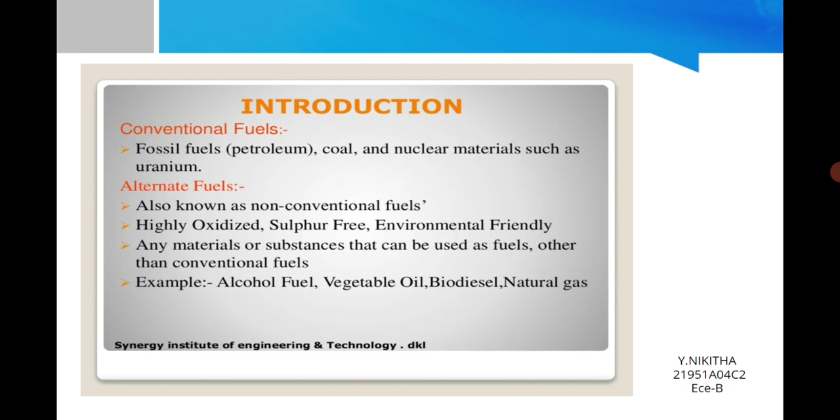Why we chose the alternative fuel? Conventional fuels are going to run out. To reduce the pollution, to protect against global warming, to save money, biodegradable and non-toxic, easy to handle and store, rural development.

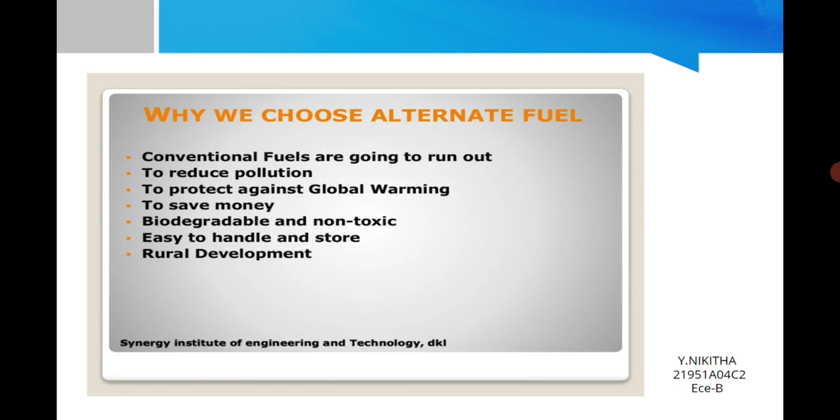Different types of alternative fuels: alcohol fuels, ethanol and methanol, water gasoline mixture, vegetable oil, biodiesel, hydrogen, LPG and CNG, electricity and benzol.

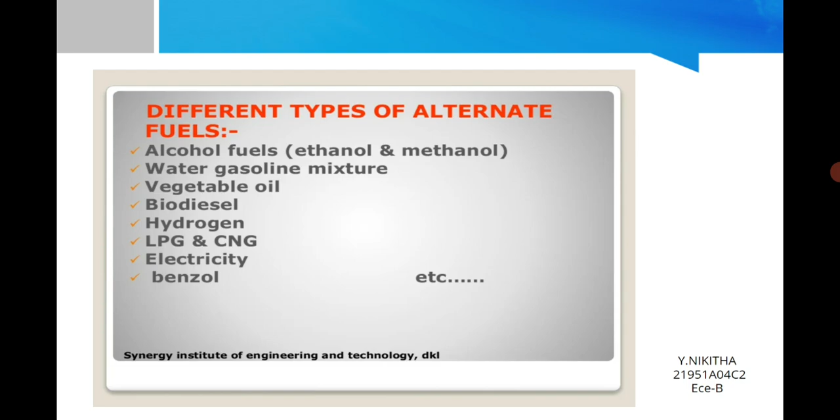Ethanol. Ethanol is a renewable, domestically produced alcohol fuel made from plant material such as corn, sugarcane, or grasses. Using ethanol can reduce oil dependence and greenhouse gas emissions.

Ethanol fuel use in the US has increased dramatically from about 1.7 billion gallons in 2001 to about 16.4 billion in 2016. Ethanol is also known as ethyl alcohol. It's the alcohol in beer, wine, rum, vodka, etc. Ethanol was used to fuel some of the first automobiles. The first production car running entirely on ethanol was the Fiat 147, introduced in 1978 in Brazil by Fiat.

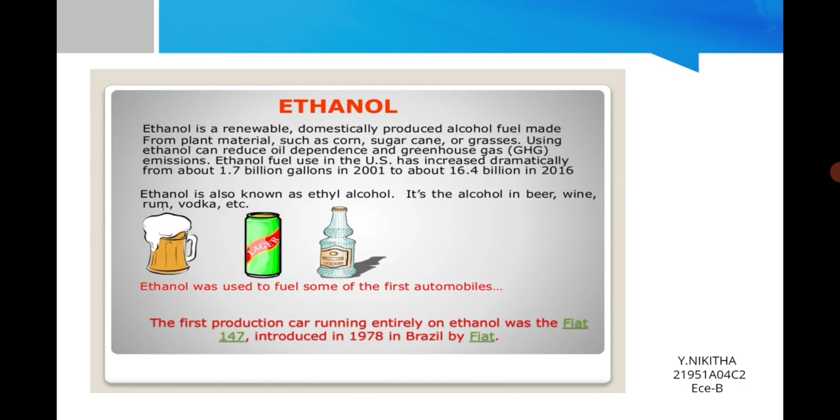So these alcohol fuels, ethanol and methanol, water gasoline mixture, vegetable oil, biodiesel, hydrogen, LPG and CNG, electricity and benzol. Ethanol, an alcohol based alternative fuel produced by fermenting and distilling starch crops or cellulose, is most commonly used to increase octane and improve the emissions quality of gasoline.

It can be blended with gasoline to create E85, a blend of 85% ethanol and 15% gasoline, flex fuel. An excellent clean burning fuel, it has a higher octane rating, over 100, and burns cooler than gasoline. High ethanol blends present a problem to achieve enough vapor pressure for the fuel to evaporate and spark the ignition during cold weather.

So, conventional fuels are going to run out. So, also to reduce the pollution, to protect against global warming, to save money, biodegradable and non-toxic, easy to handle and store, and rural development.

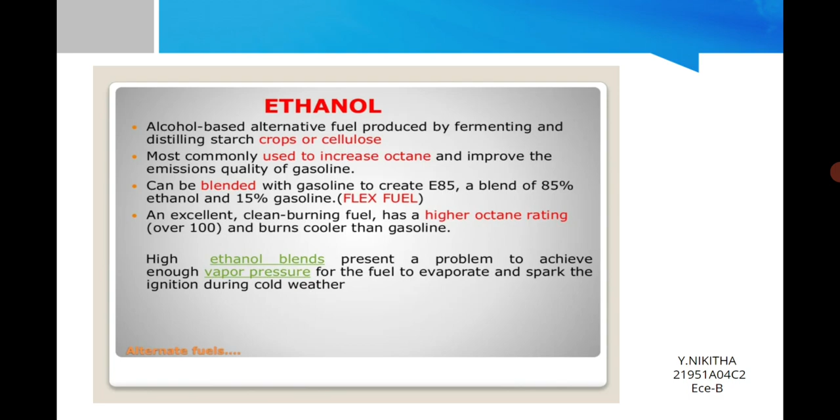This is the annual fuel ethanol production by country. In US, 2013, 13,900. 2010, it's 13,231. In 2009, 10,938. In 2008, 9,235. In 2007, 6,485. In Brazil, in 2013,

5,573.24. In 2010, 6,921.54. In 2009, 6,577.89. In 2008, 6,472.20. In 2007, 5,019.20. China: in 2013, it's 554.7. In 2010, 541.55. In 2009, 541.55. In 2008, 501.90.

In 2007, 486. India: 2009, 91.67. 2008, 66. 2007, it's 52. Annual fuel ethanol production by country in 2007 to 2013.

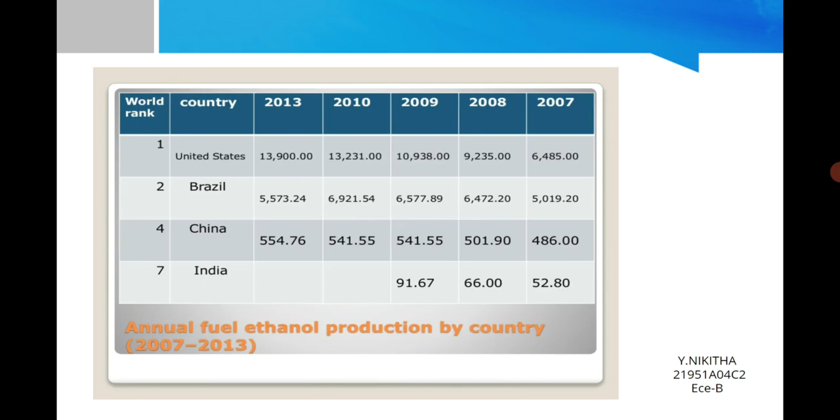Methanol. Of all the fuels being considered as an alternate to gasoline, methanol is one of the most promising and has experienced major research and development. Methanol, also known as wood alcohol, can be used as an alternative fuel in flexible fuel vehicles that run on M85. The benefits include lower emissions, higher performance, and lower risk of flammability than gasoline.

Methanol can easily be made into hydrogen for hydrogen fuel cell vehicles in the future. Methanol is extremely corrosive, requiring special materials for delivery and storage. Its chemical formula is CH3OH, the density is 792 kg per cubic meter, and its melting point is minus 97.6 degrees Celsius.

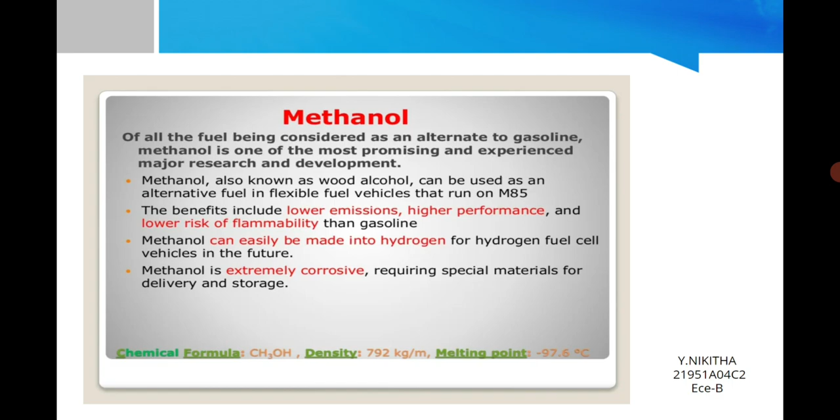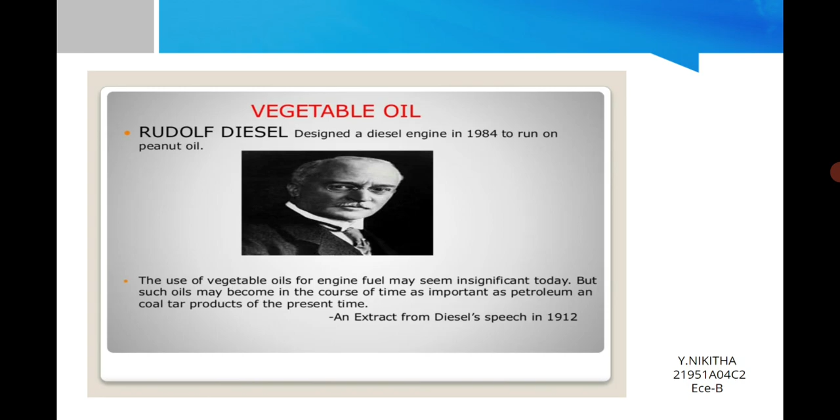Vegetable oil. Rudolf Diesel designed a diesel engine in 1894 to run on peanut oil. "The use of vegetable oil for engine fuel may seem insignificant today, but such oils may become in course of time as important as the petroleum and coal tar products of the present time." It's an extract from Diesel's speech in 1912.

Most diesel car engines are suitable for the use of straight vegetable oil, SVO, also commonly called pure plant oil, PPO, with certain modifications. Principally, the viscosity and surface tension of the SVO, straight vegetable oil, or PPO, pure plant oil, must be reduced by preheating it, typically by using waste heat from the engine or electricity, otherwise poor atomization, incomplete combustion and carbonization may result.

One common solution is to add a heat exchanger and an additional fuel tank for the petrodiesel or biodiesel blend, and to switch between this additional tank and the main tank of SVO, straight vegetable oil, or PPO, pure plant oil. The engine is started on diesel, switched over to vegetable oil as soon as it is warmed up, and switched back to diesel shortly before being switched off to ensure that no vegetable oil remains in the engine or fuel lines when it is started from cold again.

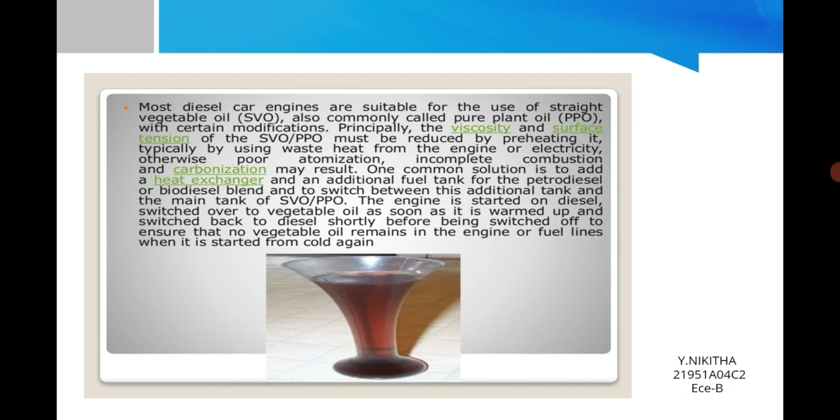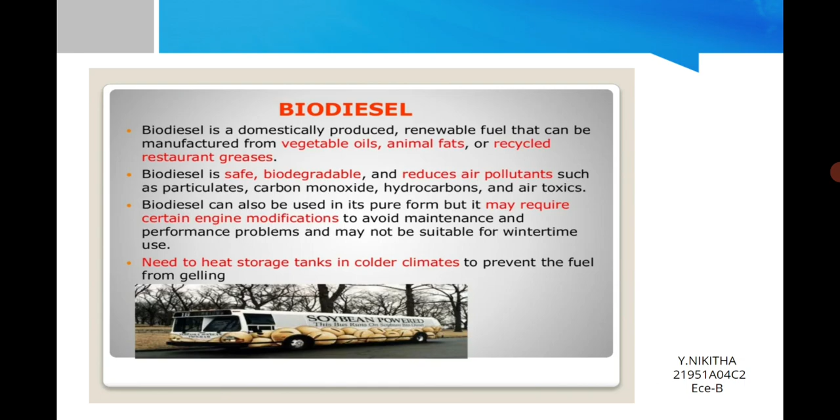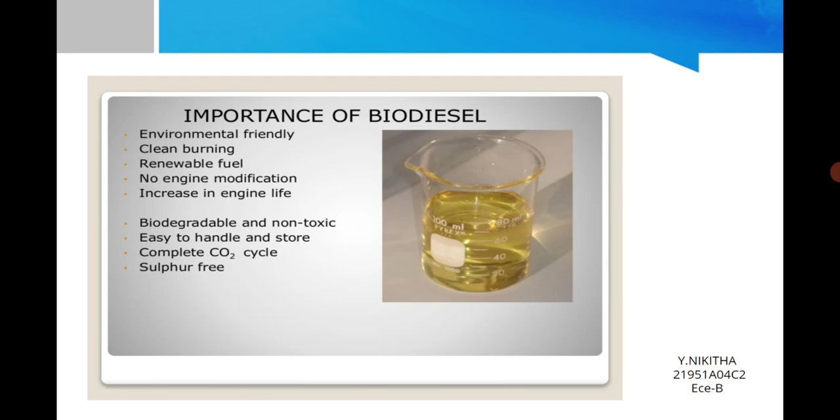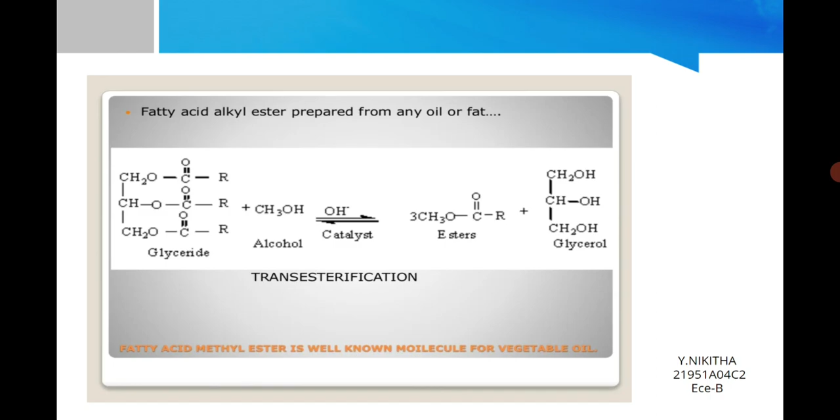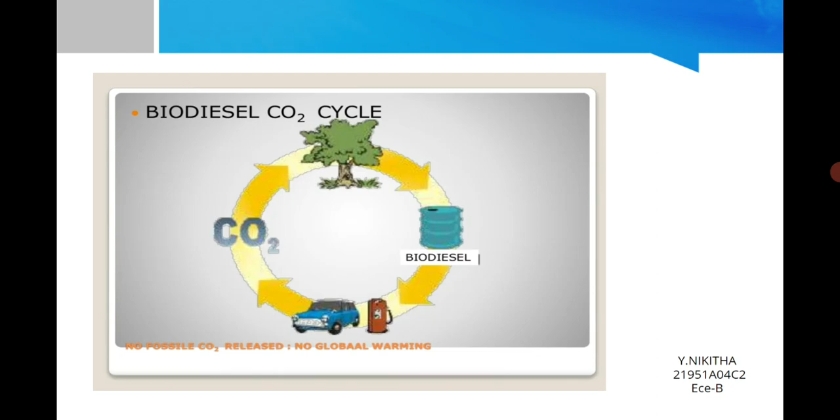Fatty acid alkyl ester is prepared from any oil or fat: glyceride plus alcohol in the presence of OH catalyst turns into esters and glycerol. That is called transesterification. Fatty acid methyl ester is a well known molecule for vegetable oil. Biodiesel CO2 cycle: no fossil CO2 released, no global warming. Biodiesel CO2 cycle: CO2, tree, biodiesel, car fuel against CO2. No fossil CO2 release, no global warming.

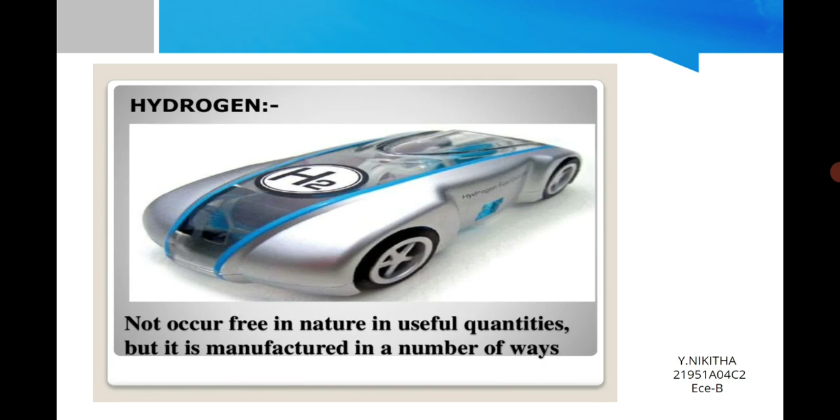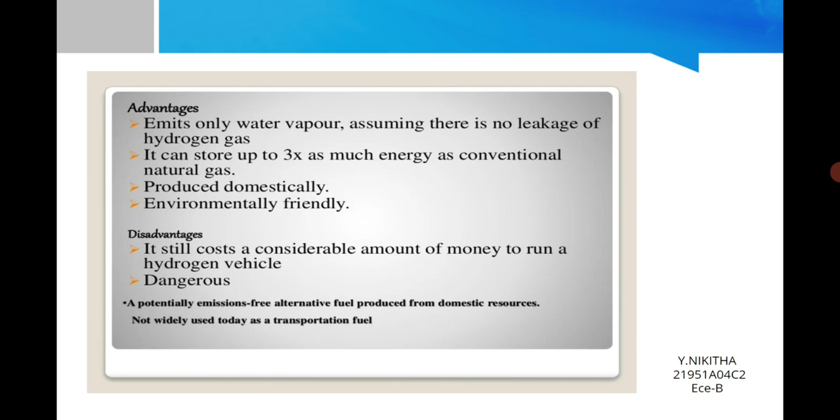Hydrogen does not occur free in nature in useful quantities, but it is manufactured in a number of ways. Advantages: it emits only water vapor, assuming there is no leakage of hydrogen gas. It can store up to 3x as much energy as conventional natural gas. It is produced domestically and environmentally friendly. Disadvantages are it still costs a considerable amount of money to run a hydrogen vehicle. It is dangerous. A potentially emissions free alternative fuel produced from domestic resources, not widely used today as a transportation fuel.

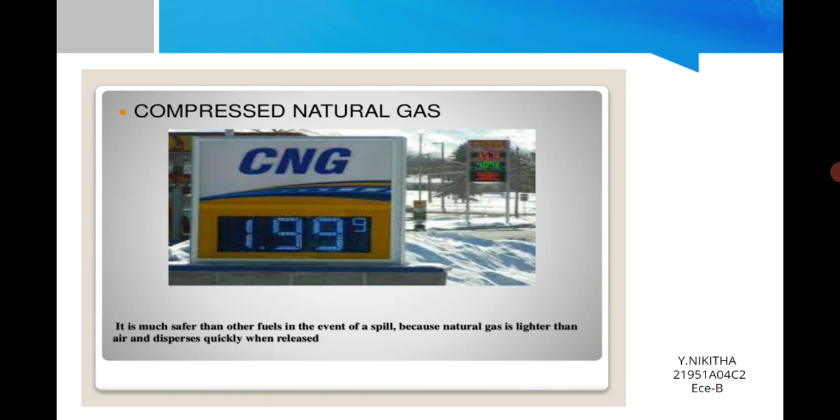Compressed natural gas. It is much safer than other fuels in the event of a spill because natural gas is lighter than air and disperses quickly when released. And it is environmentally friendly, clean burning, renewable fuel, no engine modification, increase in engine life, biodegradable and non-toxic, easy to handle and store. It is also sulfur free.

Advantages and disadvantages. Advantages: it can be efficiently and safely stored, more environmentally friendly due to its low emissions after burning. Most of the natural reserves of natural gas fields are underutilized. Improved lubrication because the cylinders are not washed by petrol excess. Disadvantages: it still produces greenhouse gas emissions, highly volatile and can be dangerous when handled or transported carelessly. They aren't as roomy as gasoline cars. Higher overall costs of a natural gas vehicle compared to a gasoline powered car.

And advantages are it only emits water vapor, assuming there is no leakage of hydrogen gas. It is produced domestically, it is environmentally friendly. Disadvantages are it still costs a considerable amount of money to run a hydrogen vehicle. It is dangerous also. A potentially emission free alternative fuel produced from domestic resources, not widely used today as a transportation fuel.

And there are alcohol fuels, ethanol and methanol, water gasoline mixture, vegetable oil, biodiesel, hydrogen, LPG and CNG, electricity and benzol.